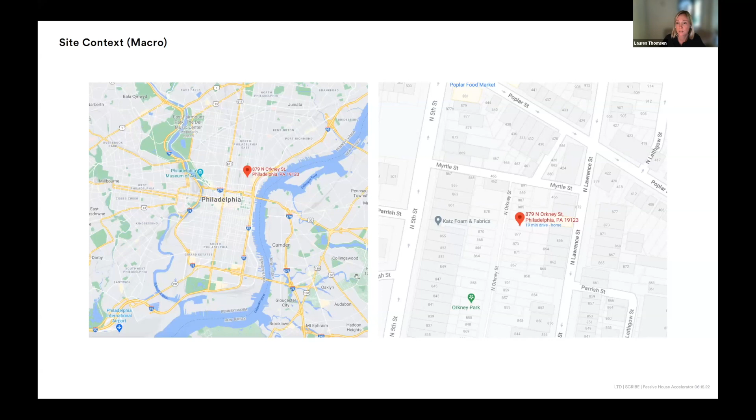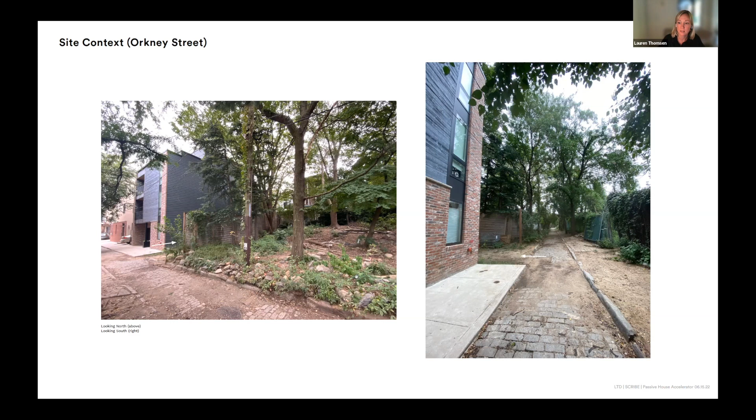The site context of the project is located in Northern Liberties, in a very dense neighborhood on a small infill lot. As you can see here, we're on Orkney Street, and the street is barely 9 feet wide. So we knew from the get-go during design this was going to be a challenge, both in terms of the density of the lot and neighborhood, but also thinking about construction. We knew from the outset it would be a tight site with constrained construction conditions.

The site is uniquely positioned immediately adjacent to a park called Orkney Park, a really lovely green space in this urban environment. It's only 18 feet by 43 feet deep, and our building is only 36 feet deep, so it's a total of 1,672 interior square feet, which is not much. And that excludes a garage, which is located within the massing of the building. The design goal from the beginning was to maximize the buildable footprint and living space on this small site.

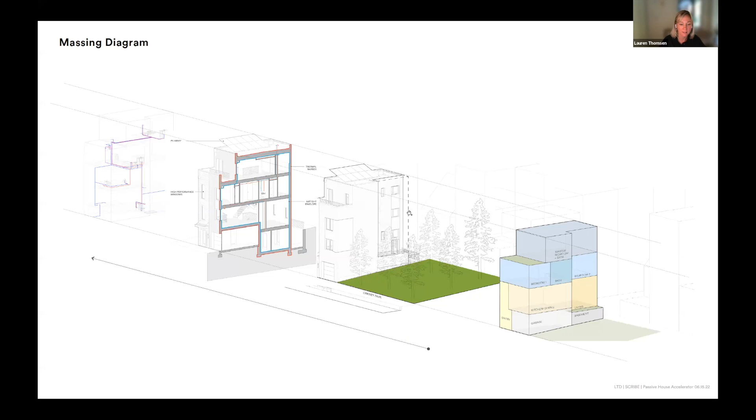However, we also wanted to be respectful and mindful of our neighbors to the south and the park. In Philadelphia there's this ubiquitous condition of a massive blank party wall that's really unpleasant to look at. So we used that, and also the fact that our south elevation has solar exposure through windows, to step a portion of that elevation back and off the party line. We sacrificed some interior space, and used that as an opportunity to create an outdoor space and a change in materiality, offering a nicer view from the park to the building, and a better urban condition, we'll call it. You can see that in the elevation.

Looking south would be the view kind of from the park. Next slide, Matt. And just a rendering of the project, as you can see.

The exterior materials being used for the project are corrugated metal and also a thermally modified oak slat, which we'll get into later in our presentation.

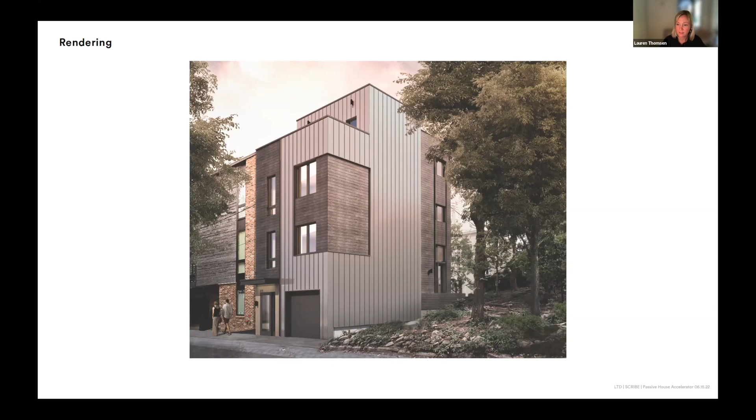So here you can see some images of the site again, which is really very constrained. In the city, we're dealing with immediately adjacent neighbors and shared property lines. A site which Ralph's truck occupies a large majority of, and also difficult turning radii and other constraints.

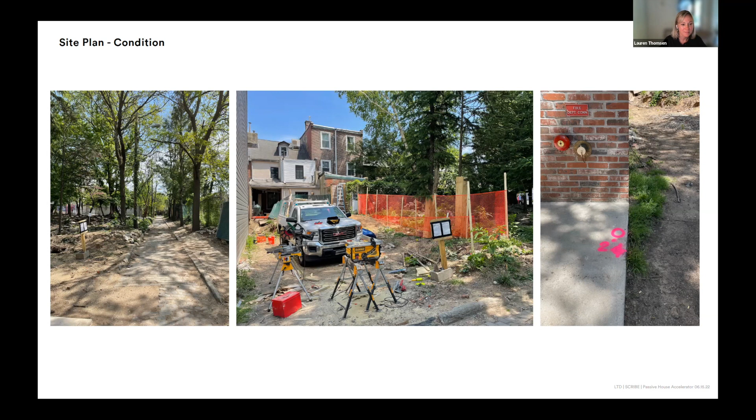Next slide. As you can see in the plans, this yields a rather small footprint that, despite being small, is a 3-bedroom home with multiple living spaces. It feels really open, and we're really happy that with the design and the interiors, you can feel that it's well proportioned—it won't feel small, it'll feel really nice and right.

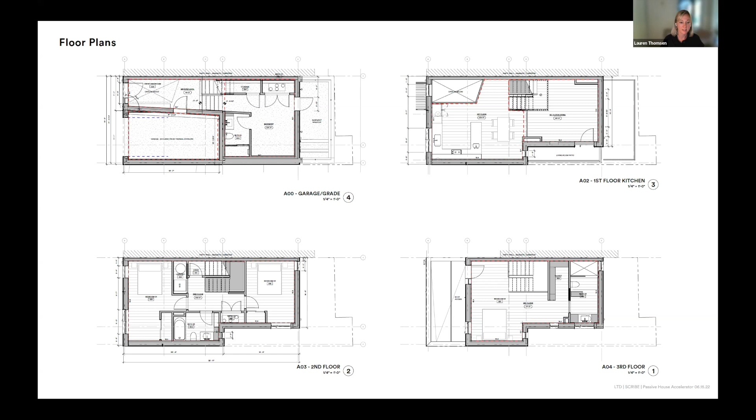Along with the planning complexity of dealing with the horizontal layers, the sectional complexity also makes itself very evident very quickly. One of the mantras of designing and building to high performance standards, where we have all these material intersections, is that it's very helpful to maximize simplicity. But with such tight and challenging site constraints, that's very, very hard. So we really had to jump into a lot of complexity from a form generating perspective, from a performance perspective, from an approvals perspective.

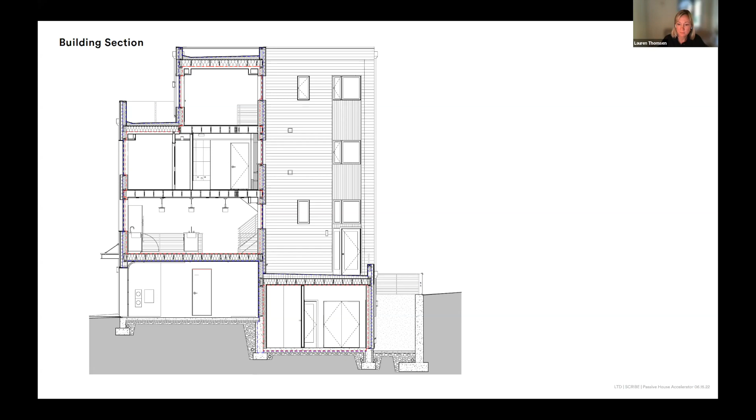So here we see where and how the garage is cutting into our building envelope, and we have some changes in level. All of this setback we're looking at on the south elevation is toward the end of clawing back some solar access and solar gain along the south.

With all of these different surfaces and conditions comes a huge array of assembly types. We would love to not have this many distinct assemblies in the project, but here they are—so many different conditions. We're oscillating between exterior walls, fire rated exterior walls, party walls, subgrade, below-grade conditions, up against garage spaces, etc. All the while thinking through the materiality, making sure we get our insulation, making sure we get our airtightness, and also taking care to make sure the thing can be built, which is obviously a challenge we'll talk a little more about.

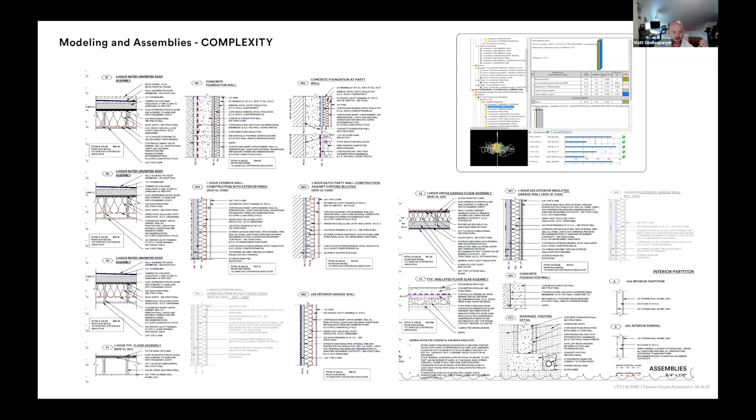So here we're going to go through some of the details and talk a little bit about how it was designed, and then how it is executed. We'll hear from Ralph and John.

Here we see what starts off as a fairly typical foundation condition, but now we're applying our thermal boundary layers, insulation all the way down the foundation walls. All of our subgrade insulation is 3 inches of EPS foam. We also take care to manage waterproofing layers and drainage to get everything running in the proper directions. Our air sealing is where it needs to be. Ralph, anything you want to add here?

Yeah, sure. I could talk a little about the materials we decided to go with for our waterproofing system. It was the first time we did anything like this—we're used to just doing a damp proof on the outside, no capillary break or anything like that. So we went through lots of different options.

Delta makes a product that you can capillary break over your footing before you pour your foundation, but it doesn't really work well with rebar. So we ended up with a liquid apply product for that.

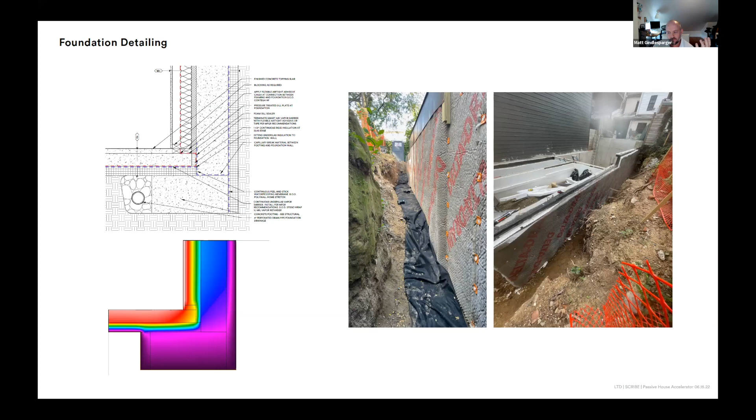As we all know, we're talking about building parts that everybody's familiar with. We're just using more of them and in different sort of configurations.

So if we take a look at and try to snapshot some of our most typical assemblies, our primary exterior wall condition starts off as what we would consider a standard 2x6 wood frame construction. Our exterior sheathing with integral weather resistant barrier goes on top of that, and then 4 inches of mineral wool on the outside — that's our continuous insulation layer.

The inside stud cavity is dense packed cellulose. And the location of air barriers is one that we bounced back and forth and discussed a lot — where do we want to place that, and how are we going to address that in this project?

While the exterior of the envelope is an interesting opportunity with integral water resistant barriers on it, since this was everybody's first shot at a passive house project — designers and builders included — we really wanted to opt for the belt and suspenders approach. So we do have an Intello layer, and our air sealing is internal to the cavity, internal to the wall assembly, and that comes with a lot of nuance in exactly how that membrane system exists.

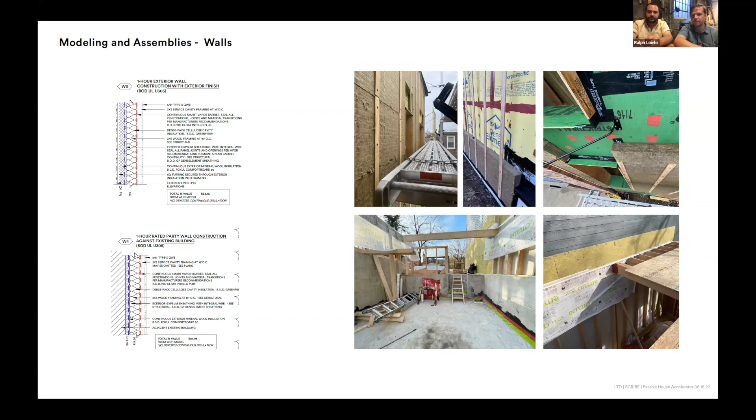I think that's really all. I think you covered most of that, Matt. Yeah, the challenges of air sealing at the windows and so forth. On the outside here, we end up with the air dam and the backer rod and all that.

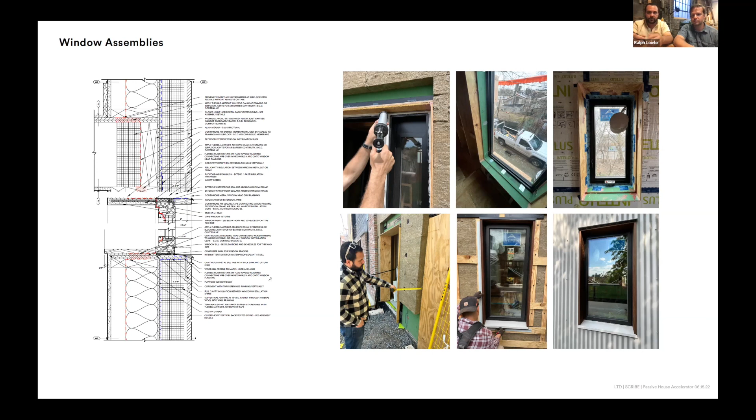Our windows came with flanges on them. We didn't really want a flange, but we had to order them because the lead time on the windows was like 40 weeks, something crazy. So we went ahead and ordered them, but later decided we probably wanted anchor straps instead. So we ended up with hybrid air sealing: on the outside we have the air dam and backer rod, and on the inside we've taped it with the Profil and the Tescon Vana where appropriate, down into the bucks.

Continuing with the trials and tribulations of air sealing, lots of detailing went into the front end of things just to understand the conception of how these might come to be. Us as the designers and CPHC spent a lot of time going back and forth with Ralph, well before any dirt started getting moved, to talk about what materials we're using, how they're organized, how we're going to get them there, to ensure the detailing was developed, reviewed, approved, and could actually be built.

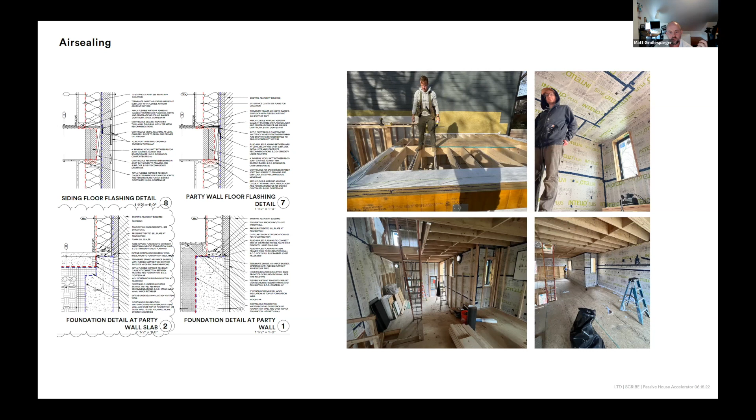And then, as everybody knows, as you really get the rubber on the road and are met with the challenges of the project in real time, you end up having to try a lot of different things, a lot of different maybes, figuring out the best way to address these issues. Ralph, John, you want to walk us through it?

So you see Johnny here, this is our first iteration, number one. We were super concerned about our floor to floor air barrier continuity, so what do you do here? We went with Intello, wrapping it up into the rim joist and then taping all the corners. That's what you see in the first slide, we were practicing our origami skills, wrapping up and taping. A bit tedious, but it certainly works fine.

But we were starting to extrapolate all the corners we had moving throughout our other horizontal assemblies throughout the project, and we thought let's try another way and see how that goes. So next we moved to this liquid applied Prosoco, our red goo, and rolled that across our entire rim and sill, which was expensive and time consuming as well, but definitely would have gotten the job done.

So then we settled on a hybrid. Instead of taping our corners, we would roll the Prosoco R-Guard roller grade FastFlash into the corners, outside and inside, and then roll the Intello up over it while it was still wet. The Intello would adhere to it and it's super airtight. Then we'd go ahead and load in our adjacent joists. Faster, way faster. That was something we thought about during the design process.

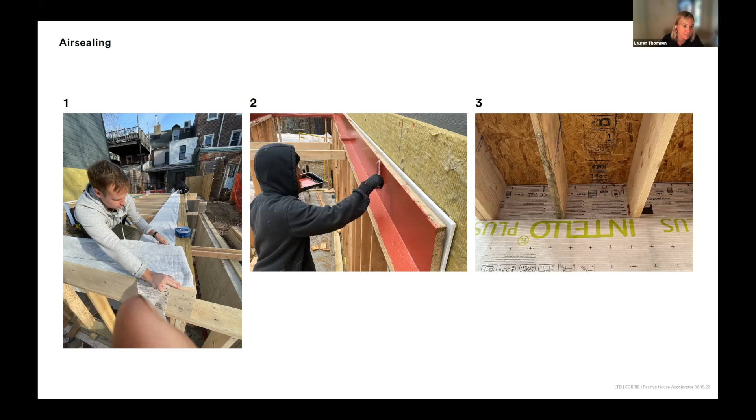So speaking of systems, our conditioning and ventilation needs are being met by two Minotair units in the project. One is in the basement, serving the lower basement level plus the primary living space, and a second one is situated at the second level, serving the bedroom floors.

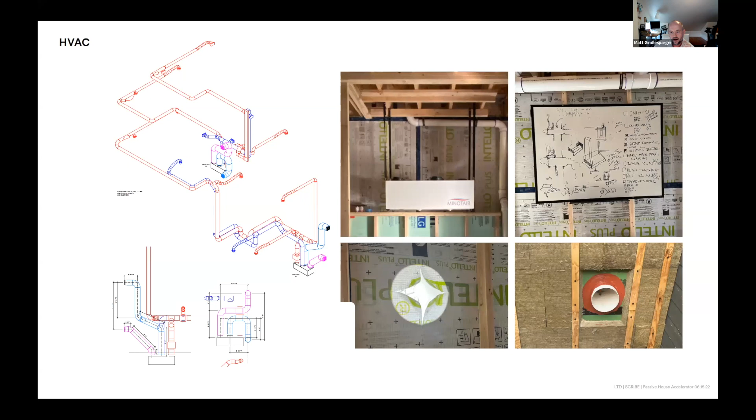We do a ton of design work at the outset of this, laying out and spatializing all the components. We wouldn't typically do this in a project, but with so much at stake spatially, and so much additional complexity in the wall assemblies with everything bigger and thicker, it was very helpful to coordinate all these systematic components into a model so we can physically see where and how everything lives and exists. We still have to manifest that, which requires an on-site whiteboard to work through the fine-grain, parts-in-hand versions of how everything comes together.

In terms of energy generation, for PHIUS pre-certification we included a PV array on the roof for source energy. This is just shy of 3.5 kilowatts of system on the rooftop, and that's how the project started.

But as it's developed over the last few months, the end user has indicated interest in incorporating battery storage into the project and charging for their electric vehicles. So that got added onto the scope of the project. Here's where having that garage space is a benefit, because doing the battery storage in the garage doesn't burden the interior living space with any additional heat loads associated with it.

In addition to the battery storage, there's also smart monitoring and controls of the electrical systems within the project, so we can see what utilization is like, how solar production is going, and how the house as a whole is utilizing the energy that it generates.

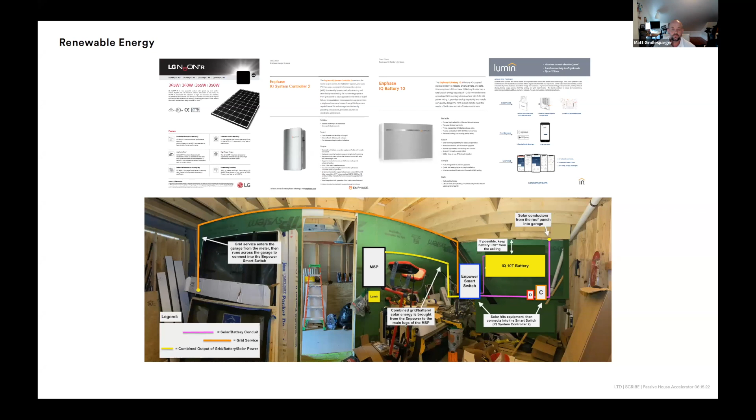There are so many facets of this project. It has been going on forever, right? It feels like we were talking with Ralph a couple weeks ago, like, oh yeah, we started this project in 2020 - but actually we started it in 2019. We started the design because we had to get zoning approvals for a variance for the garage and roof decks, so we went through the variance process, and then COVID happened and kind of shut everything down, slowed everything way down, all the while we're still trying to keep things moving with the design work. The pre-certification process is challenging and time consuming, requiring a whole different set of skills.

So this project has really been an exercise of patience, and that patience takes its way into the design process and the construction process. Sometimes a little bit of time just needs to be taken to allow nature to take its course and do its thing.

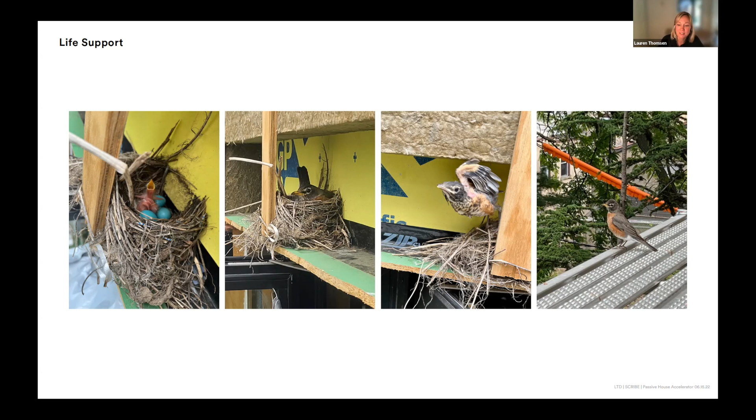Some construction was relocated temporarily to allow this to happen. We had to shift our facade work to somewhere else to wait for this to happen. The head flashing could wait there, it was fine - this was how we were getting in and out to the pump jacks anyway, so it was going to be the last spot anyway. Didn't slow us down too much. John's our team birder. That's right, proud birder, yes.

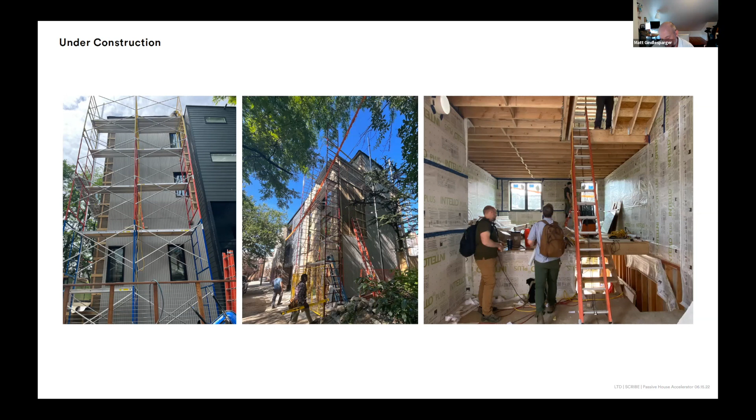Thank you, Lauren. So the project is well underway - cladding is going up, windows are in. We were on site this morning and afternoon working through plumbing rough-ins and locations of things, just continuing to trundle on in this very exciting project. This really has been incredible to work on, to have the opportunity for this much scope - it's got all the bells and whistles and all the fun associated with it from a design perspective, and to also have a great client and contractor partner in this has been very helpful. So hopefully everybody enjoyed.